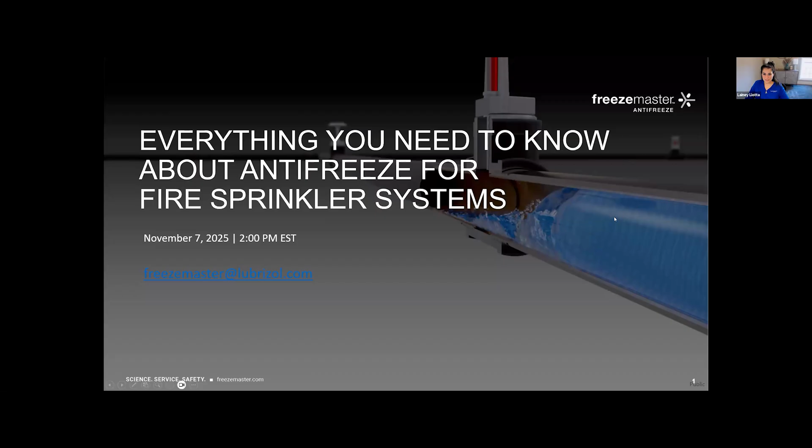First, we'll just introduce ourselves. My name is Lainey Liotta, and I'm the Global Segment Manager for our fire protection brands, which are BlazeMaster CPVC and FreezeMaster Antifreeze. Our headquarters are in Cleveland, Ohio. I'm actually based out of Jonesboro, Arkansas for the time being. But I've been in the fire protection industry for about 12 years now. Started my career off in product management at Tyco, which became Johnson Controls. Went to Chemours for a little bit and worked on refrigerants for about a year and a half, and then came to Lubrizol in this role and for various versions of it. So excited to be here today.

And Paul, I'll let my colleague Paul introduce himself as well. Well, thank you, Laney. My name is Paul Winstead, and I'm also with the Lubrizol Corporation, and I have been with Lubrizol for 14 years. Prior to coming to Lubrizol, I was a fire sprinkler contractor, and actually, February the 12th of 2026, it'll be 40 years for me. 40 years in the fire sprinkler industry, working with fire sprinkler contractors and on projects and general contractors and engineers. And I have to say, it's been a fantastic journey. I know I'm getting to the end of it, but you meet a lot of really great people, and it's a lot of fun.

So Lainey, kick it off. We'll go talk about Freeze Master today, and maybe we're going to teach you some things you didn't know, and we'll see how it goes. We want this to be kind of informal, a bit casual. We're not reading slides. I'm going to handle the codes and standards portion, or what the specific listings are, and then Paul and I tag team it. I've never installed or designed an antifreeze system or a sprinkler system in my life, so who am I to tell you guys how things work in the field? But I do sit on a lot of standards committees, codes committees, and I'm involved in new product development. So I'll go over what I know, and then switch it over to Paul for a real life conversation about tips we've seen since a listed antifreeze has been launched. I'm gonna talk about the design, the installation, all the things I see contractors having issues with out in the field, and we'll see if we can get some of that resolved today.

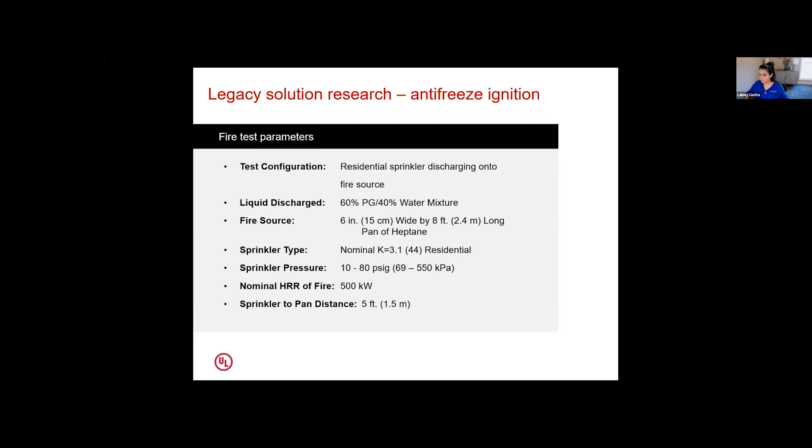We'll go over what those changes are and what NFPA requirements are. But I think the best way to explain the dangers of a non-listed antifreeze, or what we consider legacy antifreezes and field mixed antifreezes - antifreezes that aren't mixed in the factory according to precise mix and ratio - UL did some testing that I'm going to share with you, because there's no better way to explain it than to show you. This lasts about... we won't watch the whole thing. I do encourage you to check out the entire webinar from 2020 that Kerry Bell gave from UL, but we'll watch the fire performance part of it, one of these legacy research tests conducted that I thought did a nice job illustrating the concern associated with the ignition and high concentrations of these legacy antifreeze solutions.

This particular test involved the discharge of a 60% solution of propylene glycol from a residential sprinkler having a nominal K factor of 3.1, or 44 in metric units, located 5 feet or 1.5 meters above the fire source. The fire source was a rectangular pan of heptane, as you can see there. We did that because we found during earlier research conducted by UL that the location of the fire relative to the sprinkler was an important variable.

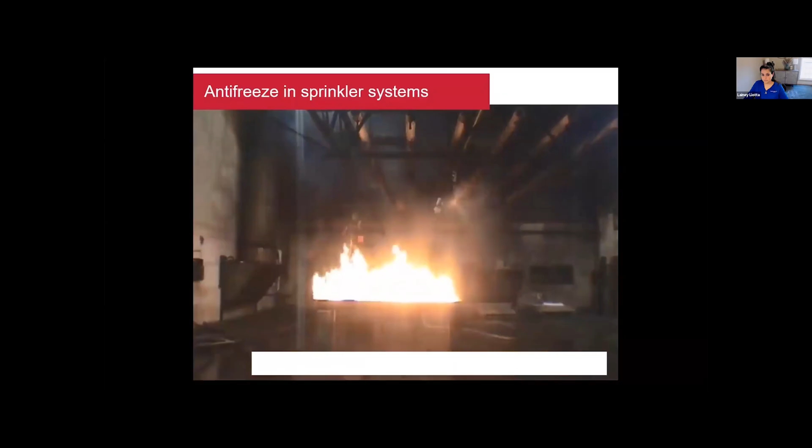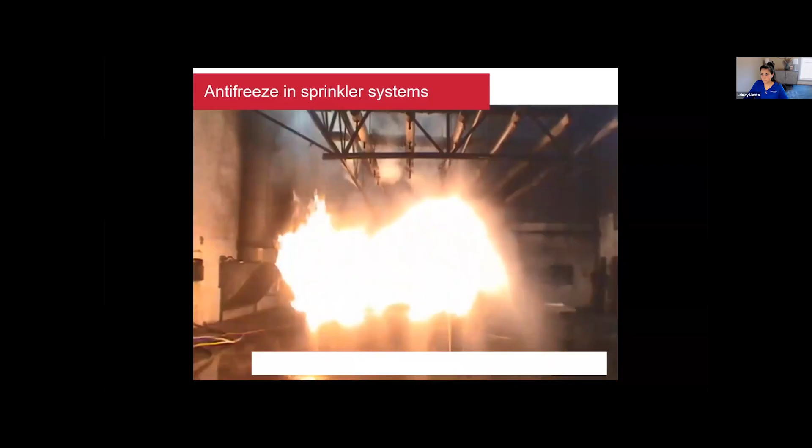Another important variable we found during earlier research was the pressure applied at the sprinkler. So we started this fire exposure test at a very low pressure of around 10 psi, or 70 kilopascals, and intended to go up to 150 psi, or over 1,000 kilopascals. But as you can see, we quickly observed ignition and substantial contribution of the antifreeze solution to the fire, so we terminated this test at around 80 psi, or about 550 kilopascals.

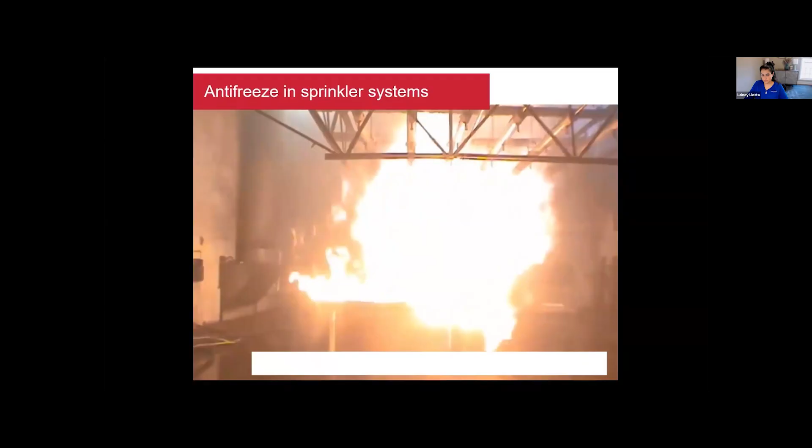What you see there is as we ramp up the pressure, we're getting more contribution of the antifreeze solution to the fire. When we terminated this test, we were measuring over 10 megawatts with our calorimeter. So basically, this antifreeze solution turned this 500 kilowatt fire into a fire releasing more than 20 times the heat release rate of the standard fire we were exposing it to.

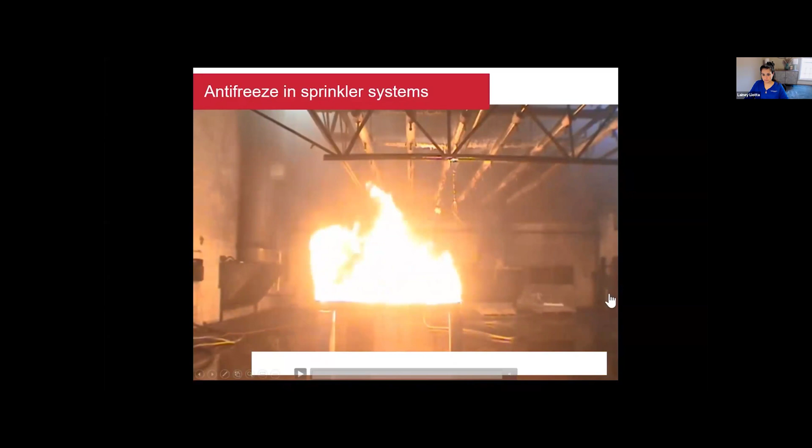Once we terminate this test at around 80 psi, we'll stop the discharge of the antifreeze solution and the fire goes back to the standard 500 kilowatts. So that was a very revealing test indicating the potential for these solutions to actively contribute to the fire.

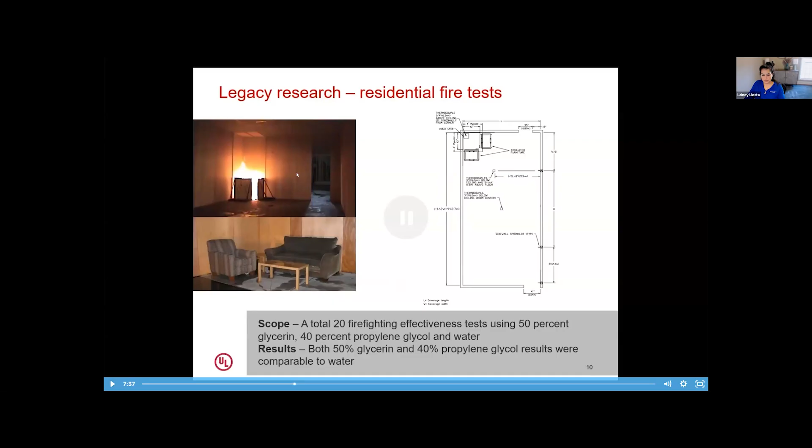I think that does a perfect job demonstrating why listed antifreezes are required, and why NFPA standards made the change to require listed antifreezes. As you saw, once the antifreeze was delivered to the fire, you saw what most people would consider an explosion. That happened in a few instances in homes and apartments, resulting in death and injuries. Fire sprinkler systems are supposed to protect lives and property, certainly not harm them. So that's the background and the importance of this topic.

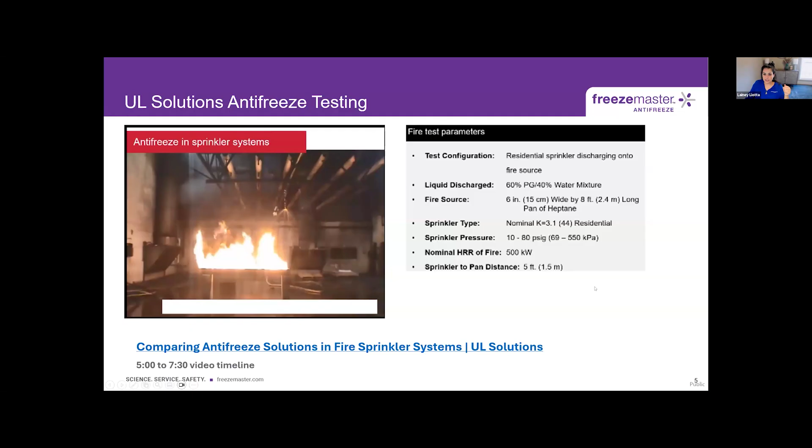So talking about what changes were made to NFPA standards in relation to antifreeze. We used to spend a lot of time on this section back in the 2020, 2021 timeframe, where different editions had a deadline for existing antifreezes to be replaced with listed antifreezes, and could spend minutes and minutes on this. However, I've summed it up into one slide because I think most people are pretty familiar with the standards now.

So I summarized it here on the slide in one word, basically that if it's a new system you're dealing with, it has to be installed with a listed antifreeze. You should not be installing any type of new system with a non-listed product. There are very few exceptions in 13D.

Which likely don't apply to many people on this call, but if you do 13D work, please go look at those exceptions, and the freeze points on those non-listed products that are acceptable are very, very high, so they can only be used in certain parts of the country anyway. But a good rule of thumb that addresses 95% of cases is: if it's a new system, you must use a listed antifreeze.

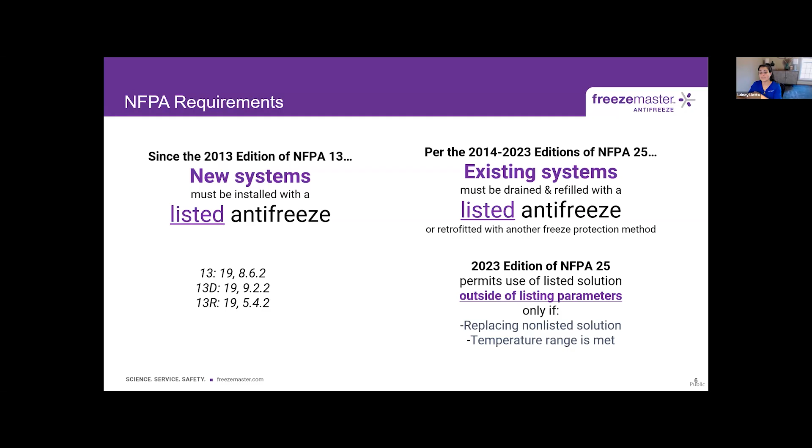That there's no other option but to use a listed antifreeze outside of its listing limitations. It gives a little bit of flexibility for those very large existing systems out there to make it more cost effective, and basically to just get the non-listed stuff out of there, because the thought is that using a listed solution is going to be safer than a field mixed non-listed solution. So we'll talk a bit about that, but that is overall a summary.

So today, as of November 7th at 1:14 p.m. Central, there are 4 listed antifreezes available on the market by 3 manufacturers. Ours by Lubrizol is freezemaster antifreeze. Tyco and Johnson Controls have 2 antifreezes: LFP Antifreeze, which stands for Liquid Freeze Protection, and LFP Antifreeze Plus, or LFP Plus. And then Noble, who most of you are likely familiar with, as they sold a lot of the legacy non-listed type solutions, also has a listed solution called Firefighter Eliminator 1330.

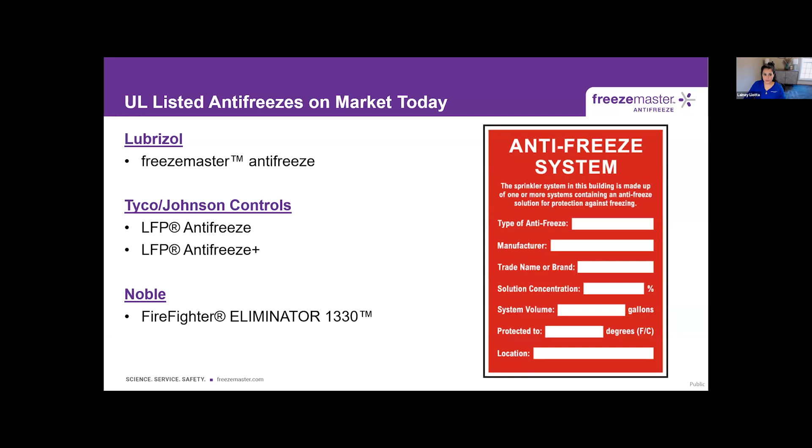So when you're dealing with a listed product or a listed antifreeze, those are the only ones available on the market today. One thing that's really important to note is that just like it takes time to develop a sprinkler head or a valve or anything that's UL listed or third-party listed, it's much more complex than just meeting one test. The legacy antifreeze did a great job at protecting fire sprinkler systems from freezing. However, it didn't do a great job at actually suppressing the fire or containing the fire, and there's also concerns about electrical conductivity, corrosion, things like that.

So UL made a testing protocol that includes 16 different tests that a solution has to go through in order to be listed. So it's not just freeze protection, right? The old stuff, because it wasn't listed, all you had to deal with was freeze protection. Now there's so much more that you have to consider. I'm not going to read all of this, but this is all of the stuff that's involved in the UL protocol that manufacturers had to consider while formulating their recipe for antifreeze.

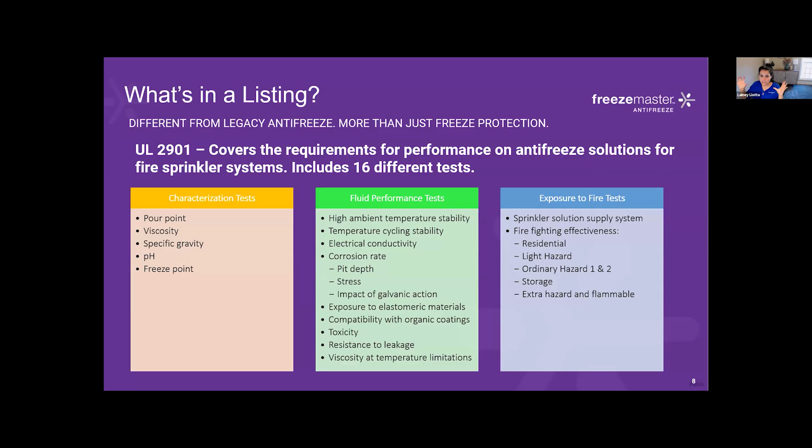Part of the reason it took so long for a listed antifreeze to come out is that this stuff takes time. The testing doesn't only take time, but the R&D that goes into this and tweaking formulas takes a really long time. So this is the background as to why there are listing parameters. They wanted to make sure - as you heard Carrie say during that fire video - they found that the pressure of the sprinkler head had a lot to do with the effectiveness of the antifreeze, and things like that. So that's just background as to why there's so much more in a listing than there was with just the old stuff that was just antifreeze.

And so in the UL protocol, what resulted is some new terms that might not have existed - or at least one did not exist - in the legacy antifreeze. One of those is minimum use temperature. So in the legacy non-listed antifreezes, you're familiar with freeze point, right? They all had a freeze point. But UL created a term called minimum use temperature, which is basically the freeze point plus an additional safety factor. It's not exactly 1 degree Fahrenheit - it can be 2, I think it's closer to 2 if you round up. But that's what minimum use temperature means.

And then the freeze point - this is a common misconception - the freeze point of the antifreeze is the temperature at which ice crystals begin to form. So if you look at it under a microscope, you start seeing ice crystals.

When people hear freeze point, sometimes they think, oh, it's frozen solid, or that's when water won't be able to make it through the pipe. That is not true. The freeze point is just, you wouldn't even see it with the naked eye. It's when ice crystals begin to form.

What isn't required to be published, but at least FreezeMaster publishes, is the pour point and the burst point. The pour point of a solution is pretty self-explanatory. It's the lowest temperature at which the antifreeze will remain pourable or flow, not slushy mix. The burst point is when the antifreeze will actually burst the vessel it's in. So those four terms are very important to consider when selecting an antifreeze for a system.

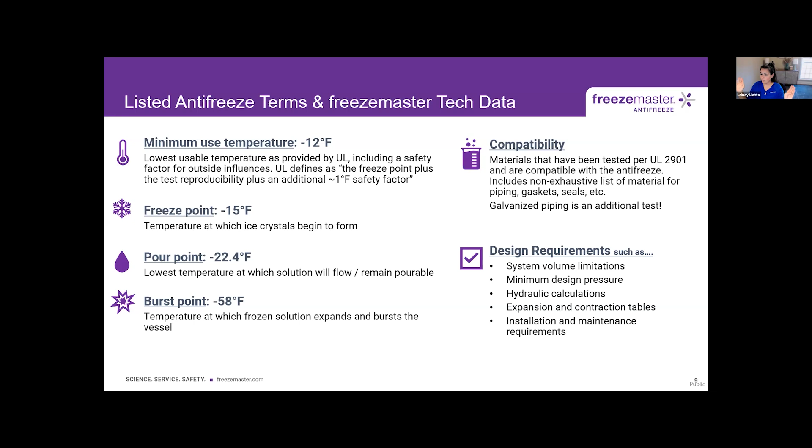Just like you wouldn't install a sprinkler head without reading the data sheet and looking at how it should be installed, where it should be installed, and what the pressure requirements are, you shouldn't do that with any listed antifreeze, whether it's FreezeMaster or others.

So these are the four most common differences among antifreezes: minimum use temperature, system volume size per application or occupancy, minimum design pressure, and compatibility with piping types and other system materials, like I explained before. Those are the four most common critical differences you should be looking for.

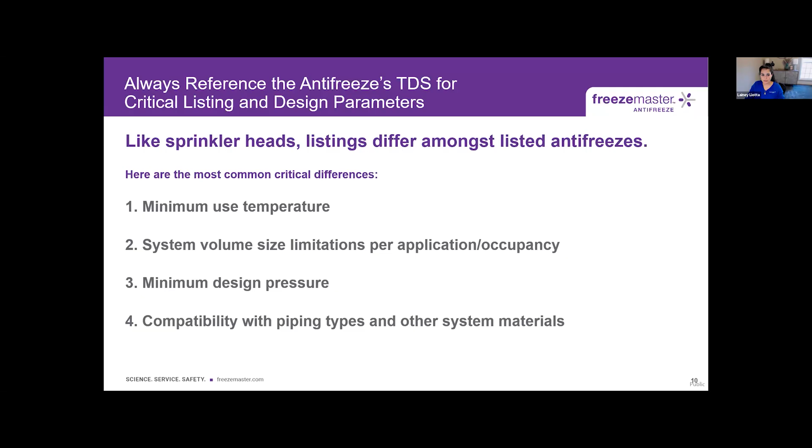This is a cheat sheet that compares all of them for you by brand. Minimum use temperature is number one. Tyco LFP Plus has the coldest minimum use temperature; however, they have a 20 PSI minimum pressure requirement and are limited to 40 gallons in ordinary hazard. FreezeMaster, for example, is the only solution that is UL listed for galvanized piping systems. So there are all these considerations you have to take into account when selecting an antifreeze.

The NFPA 25 existing system rules basically tell you that if you have an existing system that's maybe 600 gallons or 550 gallons or something like that, where no other solution exists, you can use a listed product outside of its listing parameters. They just wanted to give some flexibility and try to get the old stuff out of there.

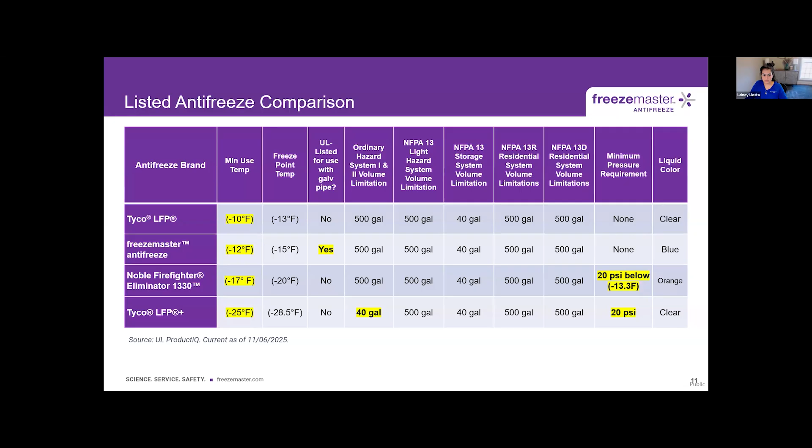This sheet is also listed on our website at freezemaster.com—this is the overall comparison of all the solutions out there available. Just one point: when you look at minimum use temperature, you have to look at the freeze point as well, burst point, etc. And NFPA has a chart in their standard.

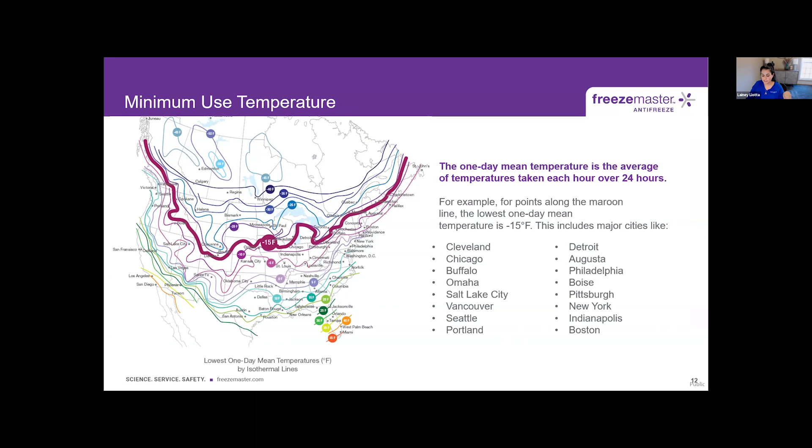NFPA has a chart in their standard that shows you the mean temperature, so that you can evaluate what freeze protection is required for where you live. But you also can't forget about conditioned spaces. Just because you might live in Alaska, for example, doesn't mean you're going to be exposed to those extreme temperatures. Maybe a -12 freeze point or a -12 minimum use temperature would work for you if you're in a conditioned space. And these are just types of common applications where we see antifreeze used.

We don't encourage the use of antifreeze in new systems that are like 500,000 gallons or whatever, right? Antifreeze should be used in smaller systems—it can be used like that, but we recommend use in these types of areas.

Where is FreezeMaster available? It is available through Viking and Core & Main here in the United States. If you're in Canada, you can get it through National Fire Equipment as well as Viking. And we'll be opening up other distributors soon.

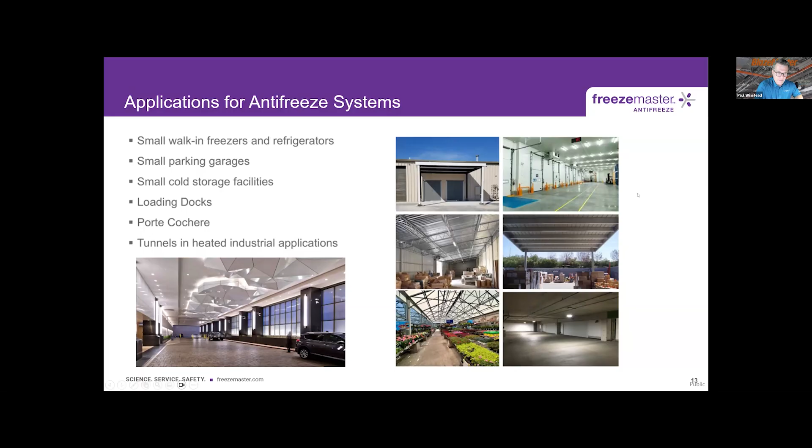Thank you. One thing about listed antifreezes, this is by UL 2901. The statement is this: it requires antifreeze solutions to be pre-mixed at the manufacturing site, and they are not intended to be diluted or mixed in the field.

So what is that? In my day, we would install an antifreeze system. We would bring out a 55-gallon drum of propylene glycol, a 55-gallon drum of water, and 5-gallon buckets. We were what you'd call a parking lot chemist. Depending on whether you were in Atlanta or Nashville or Louisville or Indianapolis or Detroit, you used the graph, and you would actually mix the propylene glycol and water together there in the parking lot. You'd put some on your refractometer, hold it up, and read the viscosity.

Now, knowing that people come into your system and open or close valves when you're not there, they keep diluting the system. The more water you add back into the system, the more you dilute it. So you take it, say, from a -10 to a -5 to a 0 to a 5. And the next thing you know, you're getting a phone call that the system is froze up.

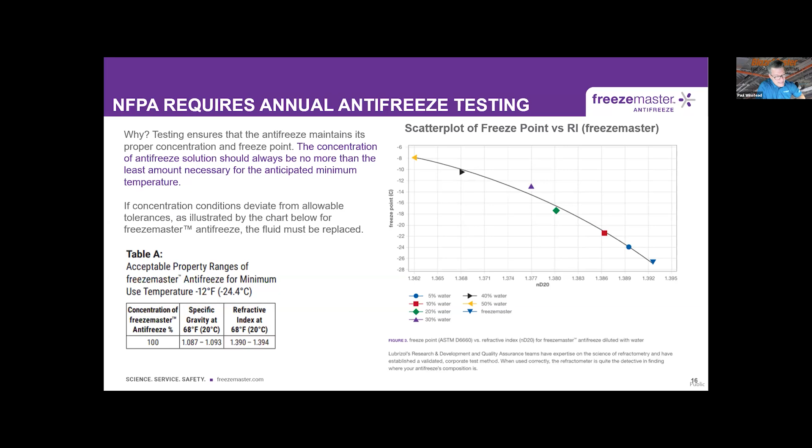Exactly. If you go to the next chart for me, Laney, these are some of the tools that you use. I have a refractometer - they're a little expensive, but you need them to do your job. I also have a cylinder here with a hydrometer in there. The hydrometer is very cheap, I bought it off Amazon for like $20. But I have to have a graduated cylinder, and you fill it up with your listed antifreeze, and it'll float, and you'll get a reading from that.

So while those are very tools that you need, those are all the tools that you need to be able to test your system. And you have to test your system so you know where you're at on your specific gravity and your refractive index. Next slide, Lainey.

One thing I want to mention specifically on this slide is there's installation instructions, and also in the standards, that says you need to completely flush the system, and there's reference to draining drops. In the 2026 edition of NFPA 25, there's going to be language in the annex that provides a little bit more direction around when drops should be drained and when they shouldn't.

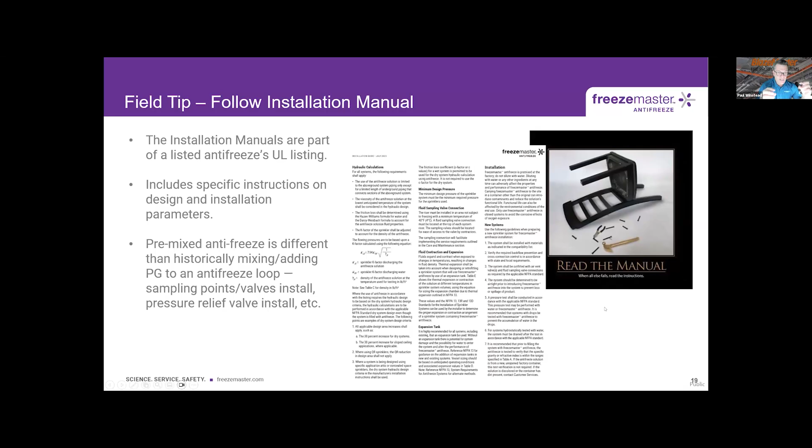But what's changed with this new UL listed antifreeze is now you're actually having to use the Darcy-Weisbach friction loss formula. You've got to calculate both. The instructions for all four tell you, you have to calculate using both. The Hazen-Williams is for calculating water in a pipe. The Darcy-Weisbach is for calculating a fluid that changes in viscosity as it deals with water temperature.

So I think of it like maple syrup. If you had maple syrup in a pipe and it was cold, it'd be very thick. If it was warm, it'd be very thin. That's basically what you're doing with the Darcy-Weisbach, using that friction loss for the fluid that changes viscosity due to temperature, while Hazen-Williams is for water.

You also have to account for the viscosity of the antifreeze at the lowest anticipated temperature. You have to adjust the K factor of the sprinkler head to account for the antifreeze density. This is all in the installation instructions.

Where I'm seeing problems, whether it be California, Nevada, across the United States, South Carolina, North Carolina, I'm asking the question. Yes, you have a listed antifreeze that's rated to -12. But when you're calculating, I think sometimes the designers are not taking into consideration the high temperature, the upper temperature, the 150 degrees, the 160 degrees. Because what we're seeing, when you look at the installation guide talking about temperature change, I have it here in front of me.

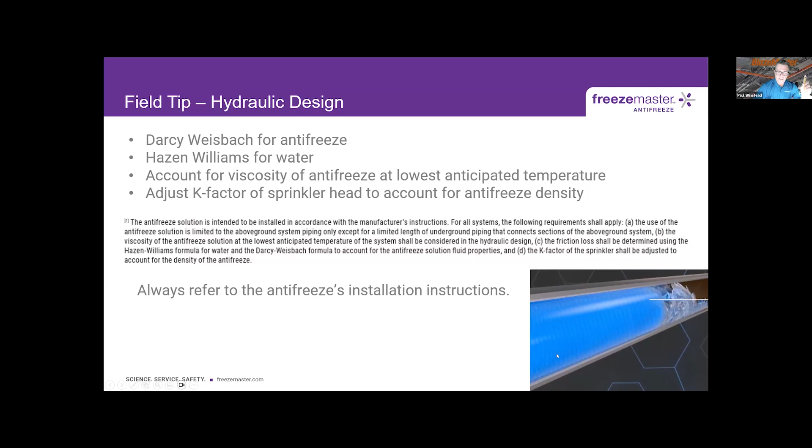Generally, Lainey, go to the next slide. I think that's where I get into, right here we go. So if you look at this, this is NFPA 13, Chapter 8.

In our check valve, we always drilled a 1/16 hole in the clapper, and that hole would allow for expansion and contraction. But with a listed antifreeze, you can no longer have that check valve. That check valve's got to be removed. You can't have that 1/16 hole clapper in there, because you're going to dilute the system, dilute the listed antifreeze. And the next time you go in there to test it, you're going to be out of spec. It's not going to read within the refractive index or the specific gravity.

So what we recommend is now using an expansion chamber, an expansion tank. What I'm seeing on a lot of existing systems where the legacy antifreeze has been removed and the sprinkler contractor is installing a UL listed antifreeze, they're coming back 3 or 4 months, 6 months later and saying, especially on a threaded system, it's starting to drip between the sprinkler head and the 1/2 RC, between the male and female threads on the fittings. And when they start putting tattletale gauges back on these systems, we're seeing them peg out at 350, 370 psi. Now, the maximum for a fire sprinkler system is 175 psi.

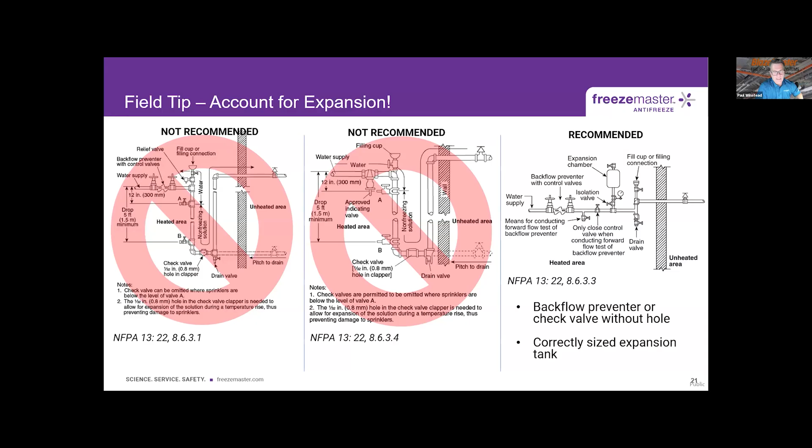There's a company out there, and there's many companies that make expansion tanks, expansion chambers. One is Amtrol. If you go to Amtrol's website, they have a calculator that has all the data, the coefficients for Freeze Master, Tyco LP, Tyco LP Plus, and Noble Firefighter Limited already figured in. It's a drop down. You pick Freeze Master, I'm using Freeze Master, and you answer the questions.

But I am seeing a lot of this, whether it be from California, Nevada, clear across the United States, from sprinkler contractors, especially when they've gone in and removed a legacy antifreeze and filled it with a UL listed antifreeze. They're starting to say, hey, this stuff is dripping. I get to asking questions, especially out in Nevada, and they'll say, well, yeah, it gets to 100, 110, 115 during the day, and it drops down to 30, 40 degrees at night. So they're having a lot of expansion and contraction going on. Just something to keep in mind.

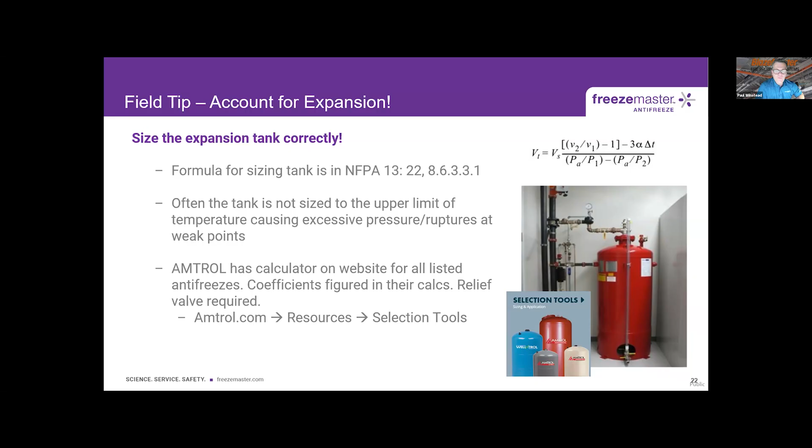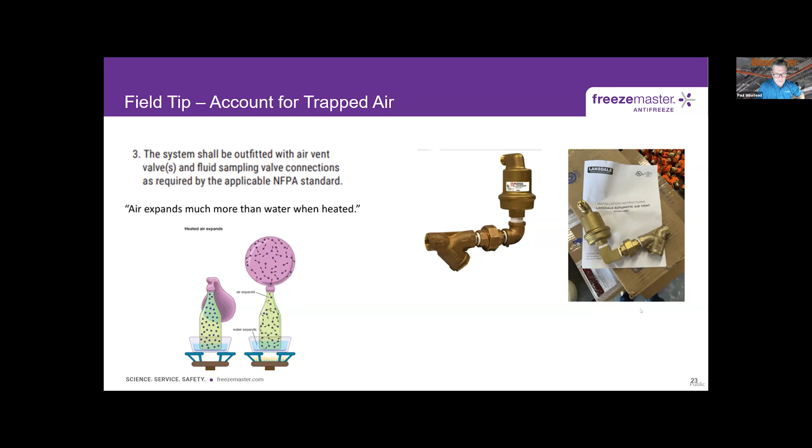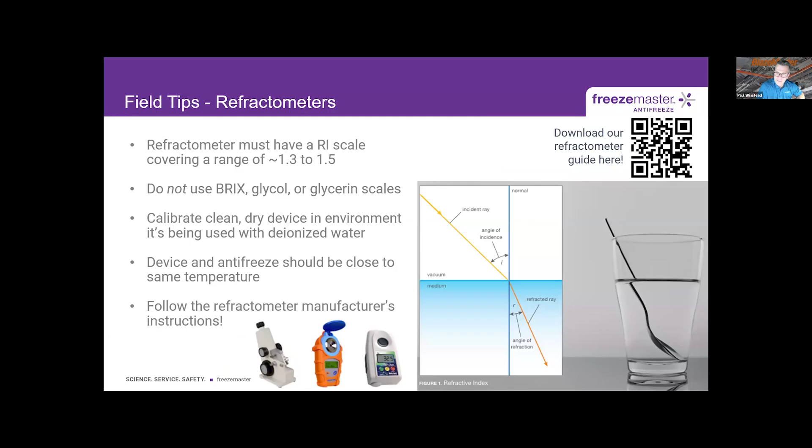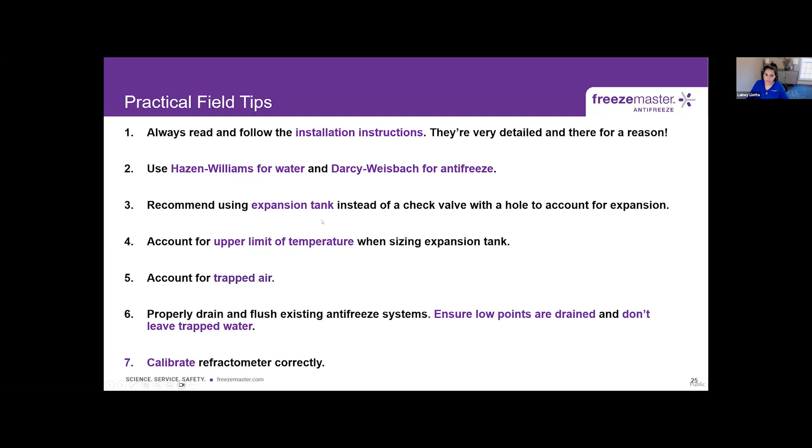So before we get to the end, we did have a question come in asking if we could get a little deeper on annual testing and specifically how to test. So I guess we didn't get into that. Sorry, I'm trying to get that. Sure, Paul, could you go over that? Yeah, okay, so fluid testing.

Now, fluid testing, okay, and I'm reading right from the FreezeMaster installation manual, page 5, called the fluid test. So now you may have a system, you may be dealing with an insurance company, an underwriter, a fire marshal, or internally within the company, whatever, that may require your system be tested quarterly, semi-annually, annually. But in our installation manual, we say at least once a year, an inspection, test, and maintenance service shall take a measurement of the specific gravity or refractive index of the FreezeMaster antifreeze system.

Now, we're going to tell you, you need to take it based upon the gallons of the system, and this is a little bit of common sense. If you have a smaller system, you don't need to pull it from as many places. If you have a large system, you may have to pull it from a few more places. You may have to put in valves, mechanical tees with valves, so you can have sampling areas.

If I had a 40-gallon system, and I can look at that system because it's exposed, I know I could probably take a sample from the auxiliary drain or from the inspector's test for that type of system, and see if it's within calibration, or within the refractive index. But if I've got a system that's 100 gallons, 200 gallons, 300 gallons, and I can't see the pipe because it's concealed, I know I'm probably going to have 3, 4 areas in the system where I can pull samples from to make sure it's within the refractive index.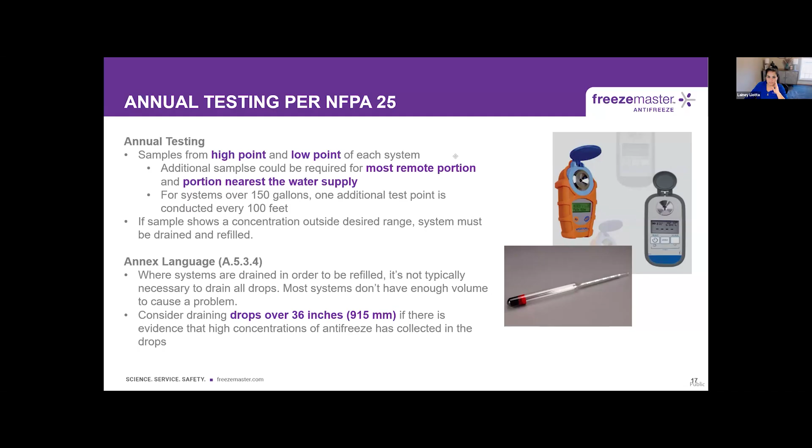Well, I've asked chemists this question. That is pretty much what the gauge has been, what your device has been calibrated at. So you'd want the fluid kind of at the same temperature as your calibrated device. I wouldn't want to test 30-degree water, I wouldn't want to test 90-degree water. As long as you're close to that 68 degrees, ambient temperature water. Does that make sense? I can't nail it down to exactly 68 degrees.

I know Tyco and Noble, I think theirs is calibrated at 70, a totally different reading. So pretty much ambient temperature water. I know everybody on this today does exactly what I do - I come into my home, I open up the cold water and let it run, and I've got a thermometer, I stick it underneath my cold water. So I always know what my cold water temperature is. I'm sure you do that at your house too, right? You don't? Maybe you're not as obsessed as I am about knowing the temperature of my water. Mine comes out right at 71, 72 degrees.